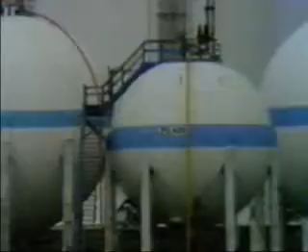Petroleum gas is obtained in conjunction with crude oil. Some consists of boil-off gases separated during the depressuring or stabilization of crude oil in the producing field. More is obtained from the crude oil during the fractional distillation process at the refinery.

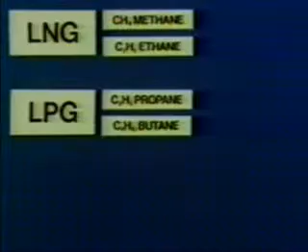LPG, liquefied petroleum gases, are used as fuel sources and as chemical feedstocks. Most LPG cargoes consist mainly of propane or of butane. Other hydrocarbon cargoes include ethylene, propylene, butylene, and butadiene.

LPG carriers may also be suitable for the shipment of such cargoes as anhydrous ammonia, large quantities of which are used in the manufacture of fertilizers. Such so-called chemical gases may require special carriage conditions. For ammonia, no brass, copper, or aluminium may be used in the system, and a few are highly toxic. Some gases require chemical inhibitors and therefore appropriate certification.

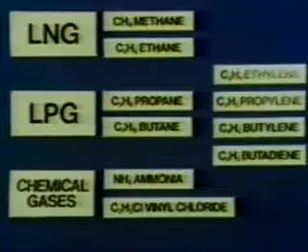For transportation by ship, the gases are liquefied, which reduces their volume by between 300 and 850 times. So the propane liquefied in this container would fill this tank as a gas at atmospheric pressure.

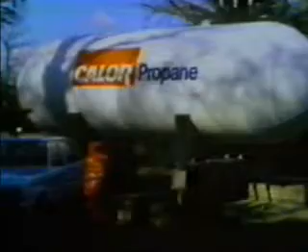Liquefaction. Gases may be liquefied by compressing them, by cooling them down, or by a combination of these processes. Each liquefied gas then maintains a relationship between its containment pressure and surface temperature.

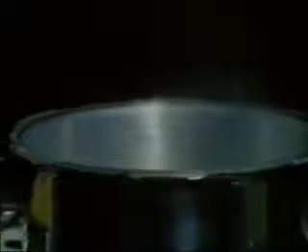This relationship can be compared to the behavior of boiling water. The water molecules are constantly moving around, and some escape from the surface to form a vapor. The warmer the liquid, the greater the vigor of this process, causing an increased vapor pressure. Here, the saturation vapor pressure has equaled the containment pressure imposed by Earth's atmosphere, equal to 0 on this gauge. The surface temperature is steady, and excess heat input to the system provides latent heat to vaporize water into steam at 100 degrees centigrade.

If the containment pressure varies, then the saturation temperature or boiling point will vary accordingly. Take heat away, then temperature and pressure fall accordingly.

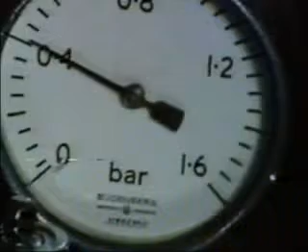Graphs that show this relationship are called vapor pressure diagrams. Since liquefied gas cargoes are always positively contained, a similar vapor pressure curve may be drawn for each, and the temperature and pressure of the cargo will always lie at some point on the curve.

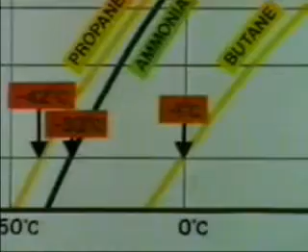At atmospheric pressure, the boiling point of a liquefied gas is below normal ambient temperatures. Butane, -1 centigrade. Ammonia, -33 centigrade. Propane, -42 degrees centigrade. Methane, -162 degrees centigrade.

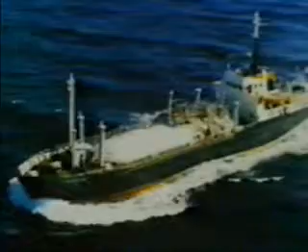Some ships contain their cargoes by the use of pressure vessels. The internal pressure for some cargo then varies, depending on the ambient temperature. The tank must be able to withstand temperatures up to 45 degrees centigrade without the safety reliefs lifting. The temperature-pressure diagram shows that a pressure of about 15 atmospheres may then be expected with propane, which is reasonable from the design point of view.

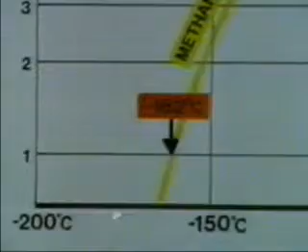Clearly, we cannot build a reasonable ship to contain methane in this way, since at 45 degrees centigrade, the internal pressure would be several hundred atmospheres.

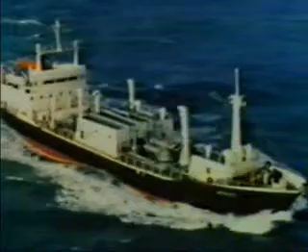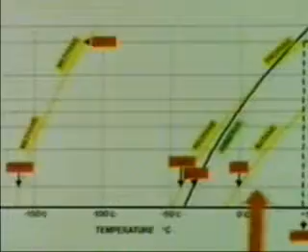If the pressure in the cargo tank is controlled, then the temperature will also be regulated. Semi-pressurized ships control the pressure to some intermediate figure. The temperature in the tanks is lowered and insulation is required. Fully refrigerated ships control the pressure to approximately equal atmospheric, thus minimizing stresses for the cargo containment system.

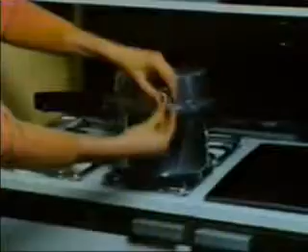In this domestic pressure cooker, the temperature is controlled by the setting of the pressure relief valve as demonstrated. The same principle applies to this fully refrigerated vessel. Heat ingress to the cargo through the insulation system is balanced by heat taken from the surface of the cargo as liquid is vaporized. An increase of pressure is prevented by drawing off the vapor produced, so the temperature remains constant.

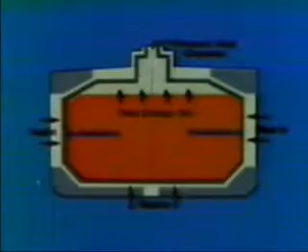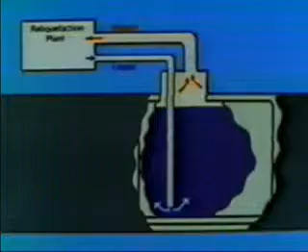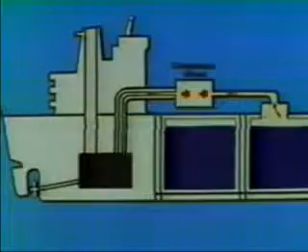Reliquefaction. In LPG and ethylene ships, this vapor is turned back into cold liquid at the ship's reliquefaction plant and returned to the tank. Reliquefaction is more difficult with LNG due to the very low temperatures required, and so methane boil-off is used as fuel in the ship's propulsion unit.

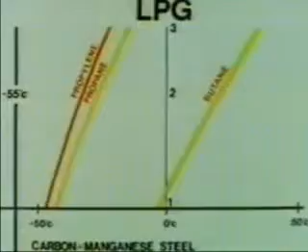A problem that arises with refrigerated containment is that the low temperatures involved require the use of special containment materials. For temperatures down to minus 55 degrees centigrade, allowing the carriage of fully refrigerated LPG and most chemical gas cargoes, only slight modifications to the steel shipbuilding alloys are required.

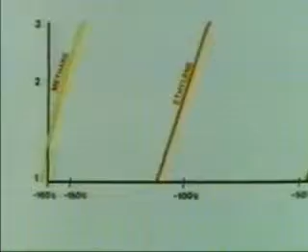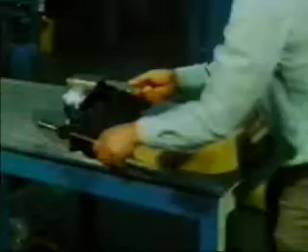Since at atmospheric pressure, methane boils at minus 162 degrees centigrade, LNG containment systems require particularly specialized and expensive materials. Great care must be taken to avoid spillage of liquefied gases onto ordinary ship's mild steel, since this becomes brittle at low temperatures and fracture will occur.

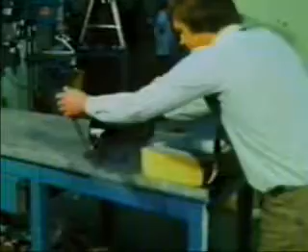Clearly, the carriage of liquefied gas cargoes is potentially hazardous, because a major escape of cargo would lead to sudden and enormous evolution of gas, probably followed by a catastrophic fire. Major air pollution could be caused by the chemical gas cargoes, and the cold from an escape of cargo could cause further structural failure in the ship.

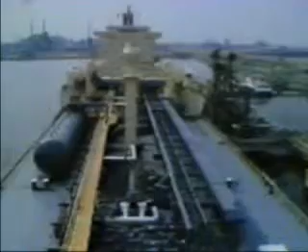The Inter-Governmental Maritime Consultative Organization, IMCO, has produced a code for the construction and equipment of ships carrying liquefied gases in bulk, and each ship has a certificate of fitness to carry certain cargoes in accordance with this code.

Liquefied gas ships are built to provide a greater degree of precaution against failure of the containment system than is found in normal tankers.

Pressure vessel systems like this are tested before entering service by applying an internal pressure of 1.5 times the maximum pressure which should normally arise.

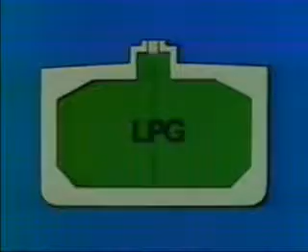Many gas ships apply the principle of double containment. In this fully refrigerated LPG ship, for example, failure of the primary containment tank would allow cargo to escape into the surrounding hold space. Those parts of the hull which could be cooled by contact with cargo in this way are made of suitable steel and form a secondary containment barrier.

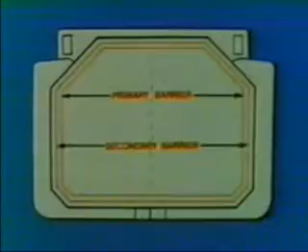The outer hull may not be used as a secondary barrier in LNG ships since temperature stresses would be too great. This LNG ship contains the cargo in a thin membrane of invar, and a further similar membrane partway through the insulation forms a secondary barrier. The insulation and membranes are supported by the inner hull of the ship.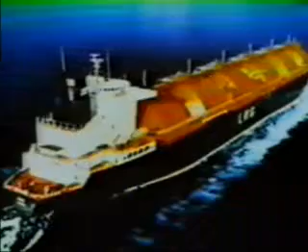An alternative used in this design of LNG ship is to use a relatively simple geometrical shape for the tank, without internal stiffening. The designer can then show that any cracks in the tank structure will only spread very slowly, giving time for suitable action to be taken.

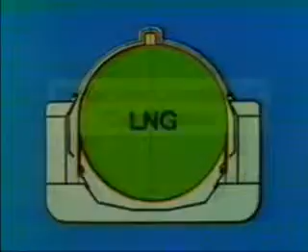As well as being concerned with the achievement of reliability in the containment system, the code also requires that the cargo tanks be protectively located so that minor collisions or grounding damage should not cause release of cargo.

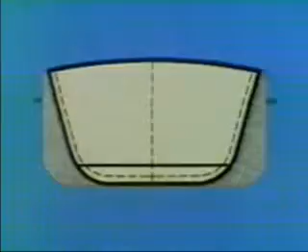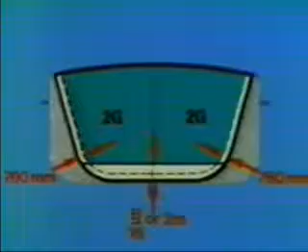A normal liquefied gas ship, described as belonging to IMCO Type 2G, must have its cargo containment more than 760 millimeters from the outside shell, and more than B/15 or 2 meters, whichever is less, above the bottom. Double bottoms are fitted.

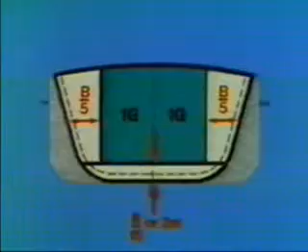A few very dangerous chemical gases require IMCO Type 1G containment. Here, even more protection against penetration in a collision is required, and so the tank must also be more than 1/5 of the overall beam from the ship's side.

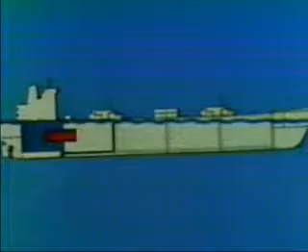If a refrigerated gas carrier were to sink, any reliquefaction plant would stop, and there would be uncontrollable release of cargo through the safety relief valves. To minimize this risk, the ship must be able to withstand, without sinking, a far greater degree of collision or grounding damage than could a conventional tanker.

For example, an IMCO Type 1G or Type 2G liquefied gas ship 250 meters long must be able to survive side damage 13 meters in length anywhere along her hull.

Although there is great variety in the general arrangement of liquefied gas carriers, they all follow some basic design rules to minimize the risk of fire and health hazards due to cargo gas.

Using the principle of the fire triangle, the ship is divided into zones where there will usually be sources of ignition, which therefore must be kept free from cargo gas, and zones where cargo gas may be unavoidable at times, known as potentially hazardous or gas dangerous zones.

The safety barrier or boundary around gas-safe zones has to be carefully guarded against the ingress of gas. Accommodation ventilation, for instance, may be set to mainly recirculate during cargo operations and maintains a slight positive pressure so that any leakage will be of air passing outwards.

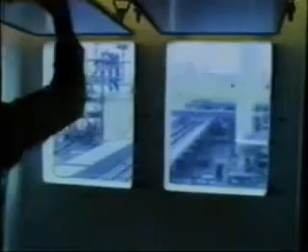Doors and ports are kept closed, and there are no openings in the forepart of the accommodation. The bridge front is insulated, and if fire does occur, can be further protected by a water wall, shown here by arrows pointing to the outlets.

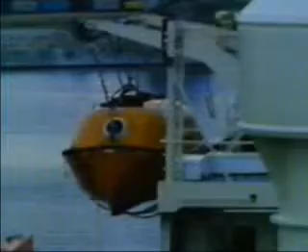The water wall is also a protection for the lifeboat embarkation stations in the event of abandoning ship. The accommodation can be so efficiently secured in a large modern gas carrier that in the event of a mishap, such as a release of toxic vapor, it can be used as a safe refuge.

The ventilation is stopped completely, and other crew members may remain inside until the ship's emergency party, wearing protective clothing and breathing apparatus, can stop the leak and check that the atmosphere has become safe again.

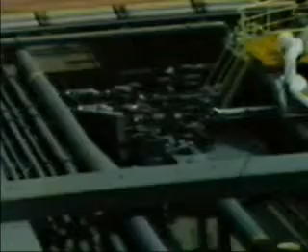A further gas-safe zone with positive pressure of air and airlock doors may be set up for the cargo control room and the motor room beneath, housing electric motors for compressors and reliquefaction plant.

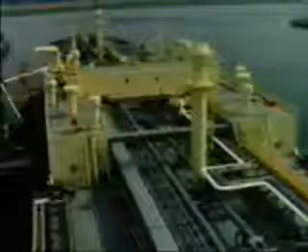So far as possible, direct connections are avoided between the cargo tanks and the control room. For instance, pressure readings are taken indirectly through pneumatic pressure transmitters.

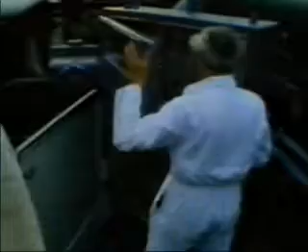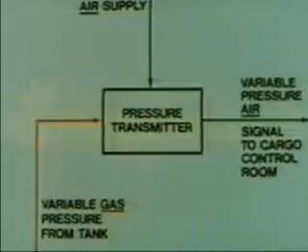The gas dangerous zone includes the cargo deck area, the cargo compressor room, the cargo tanks and hold spaces around the tanks. These hold spaces are potentially dangerous because of the risk of cargo vapor leakages.

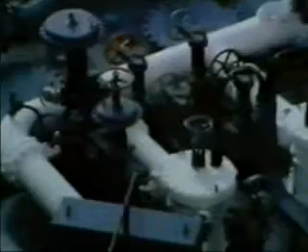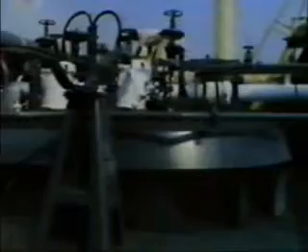To minimize this risk, all connections to the cargo tanks must be made in the open above the main deck. Tank domes stick up through the main deck for this purpose, with flexible gas-tight seals around them.

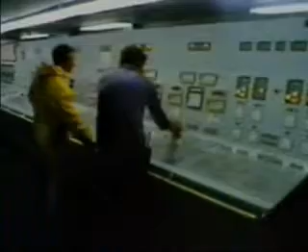In modern liquefied gas ships, the hold and compressor room atmospheres are continually monitored for the presence of cargo vapors. And in refrigerated ships, inert gas, or nitrogen, is maintained under slight positive pressure in the hold and interbarrier spaces, so that even if slight leakage does take place, flammable mixtures are prevented.

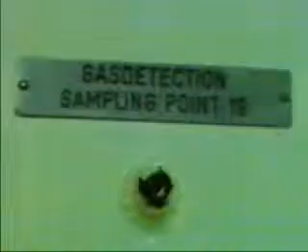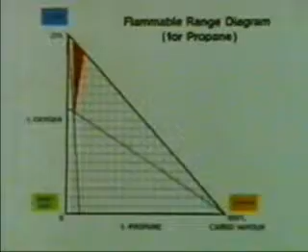Unlike many petroleum tankers, flammable mixtures are also avoided in the cargo tanks. Mixtures of cargo vapor and air are only flammable within certain limits, and when loaded, the tank contains 98% cargo liquid and 2% vapor, so the atmosphere is over-rich and consequently non-flammable.

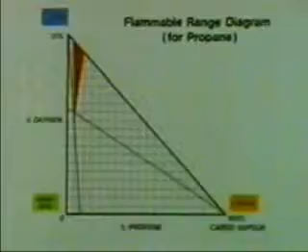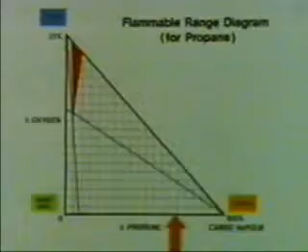Because the tanks are always maintained at a slight positive pressure, this allows the safe use of submerged electric cargo pumps for discharging. Should the tank have to be gas-freed after discharge, perhaps for repairs, the cargo vapor remaining is displaced not by air, but by inert gas deficient in oxygen, so that the atmosphere does not become flammable.

When sufficient cargo vapor has been displaced by the inert gas, fresh air can then be introduced to make it safe for entry without at any time passing into the flammable region.

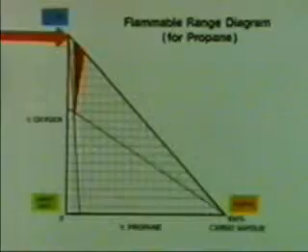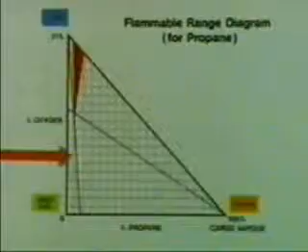Before reloading the tank, the first step is to replace most of the air with inert gas, before allowing cargo vapor into the tanks.

Because of the contractions involving the cool-down, commencement of loading on refrigerated vessels must be carried out slowly and carefully, as laid down in the vessel's operating manuals.

The complexity inherent in liquefied gas carriers and the nature of the cargoes mean that there are a number of potential dangers to personnel which must be guarded against.

Where highly toxic cargoes are worked, it may be necessary to wear breathing apparatus, especially in enclosed spaces such as compressor rooms.

Additional respiratory protection, such as escape breathing apparatus, is available for everybody on board, so that the ship can be safely evacuated if necessary.

Suitable test equipment, fixed and portable, is available for testing for cargo vapor in open or enclosed spaces.

Due to the widespread use of inerted atmospheres, it is important that tests for 21% oxygen be considered before allowing entry to enclosed spaces. The combustible gas indicator and toxic tester are also required.

Escape of liquid at leaking joints and glands could be dangerous both to personnel and to the ship's structure. Personnel will need protective clothing to guard against cold.

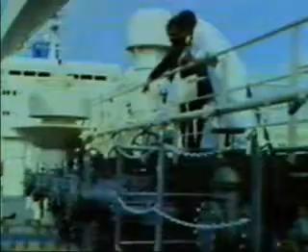LNG ships are so vulnerable to this type of damage that deck areas near the manifolds may be sheathed with wood, and during cargo work, water is left running continuously over manifolds and tank domes.

Should cargo fire occur, the requirement is to stop the escape of cargo and so starve the fire. If the fire is extinguished in other ways, there is a risk that a larger cloud of flammable gas might reignite.

Releasing the air pressure from the emergency loop line causes pumps and compressors to stop and main valves in the system to close.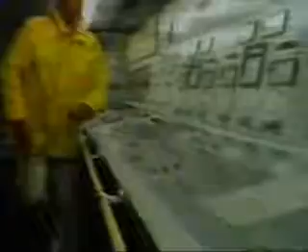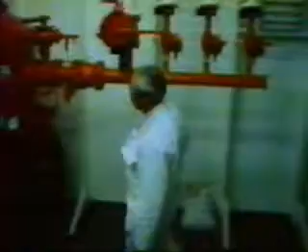Fixed and portable dry powder extinguishing equipment is supplied to knock down the flames if necessary. Remember to follow the correct procedures.

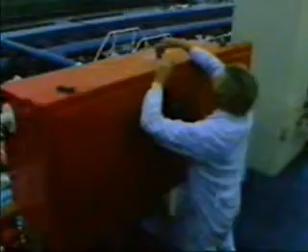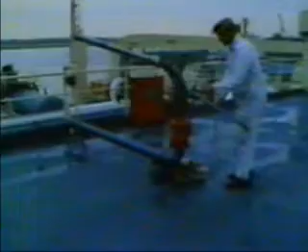The water spray should be used for cooling purposes to prevent reignition. Always thoroughly check the equipment and ensure it's in a safe working condition.

Information concerning many aspects of safe operational practice may be found in the ICS Tanker Safety Guide, Liquified Gas, including data sheets describing many gases carried. Also in the booklet Safety in Liquified Gas Tankers, published by the International Chamber of Shipping, in which basic principles and definitions are available.

The IMCO code for the construction and equipment of ships carrying liquefied gases in bulk should also be consulted. You must ensure that you are familiar with your own company's safety rules and regulations.

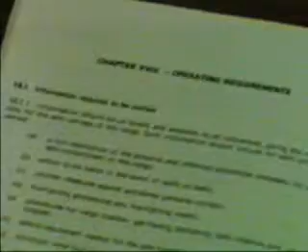Pay full attention to the sections Plant and Equipment and Ship and Shore Personnel, including those involved with the operation of your particular vessel, and be alert at all times to meet any emergency.

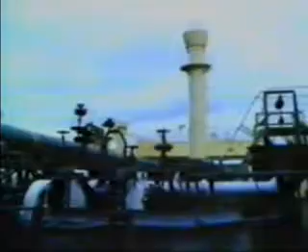Although the potential hazard from liquefied gas cargoes is great, the stringent additional precautions taken for the design, equipment and operation of these ships have resulted in a commendable safety record.

For safe operations, follow these basic principles. Always understand the operation in hand. Know your commitment within the vessel and your team. Never take chances or assume anything. Always check and double check.

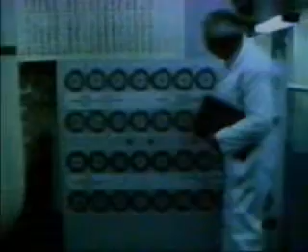Remember, you have a responsibility to yourself, your shipmates, owners and ports of call.

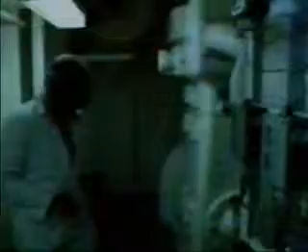So know your vessel, follow procedures, and give 100% attention to your duties at all times. So if you think you've checked, check again.